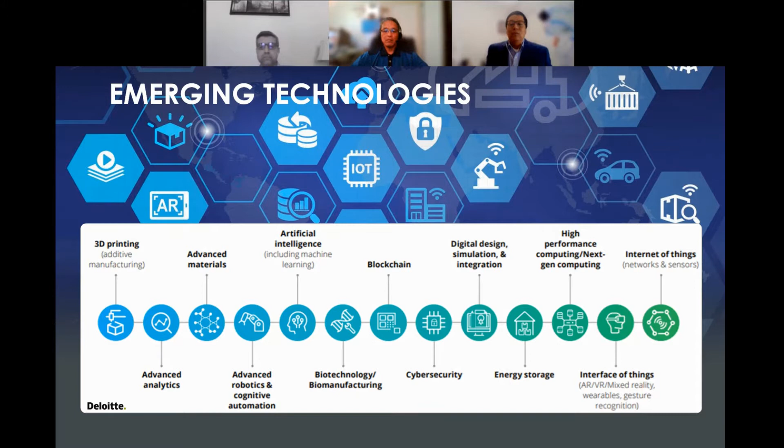This screen shows a recent report from Deloitte. The report speaks to the fact that new and emerging technology trends will change the industry. This is evidenced through many point solutions coming to market that focus on industry trends such as AI, IoT, or 3D printing. These point tools have accelerated the use of some of the emerging technologies for design. However, they are point tools and remain disconnected from the design process, leading to data silos, broken processes, and lost data. But what if you could harness emerging technologies such as AI, IoT, AR, additive manufacturing, etc., within your existing design environment and tools?

Well, you can. At PTC, which is why I'm so excited to be here today, we are taking these latest technology trends and deeply integrating them into your design environment so that you, as a design engineer working in your everyday CAD tool, can use them freely. PTC is the world's innovator of commercial 3D CAD, and we are now leading a renaissance of industrial design by delivering these integrated technology trends in Creo. Let me show you what I mean.

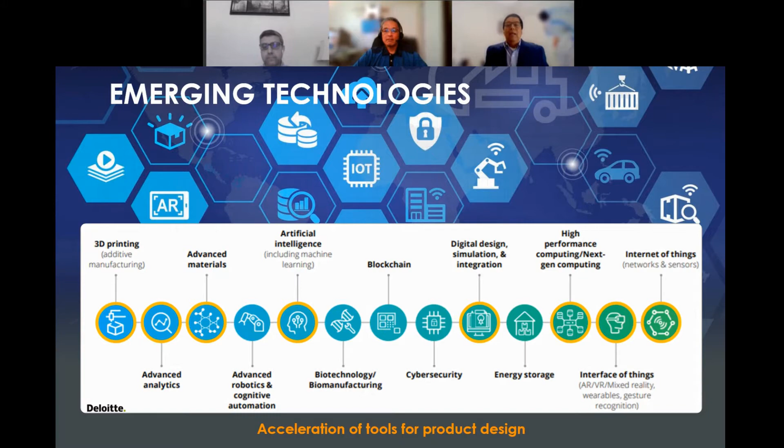At PTC, we're working on these 5 major areas, which happen to map very, very well to the major emerging technologies that Deloitte has outlined and that we know are critically important to you. I want to point out 2 really key things. First, we are not introducing point solutions. We are implementing and improving these areas directly into Creo. They will be integrated and be part of your existing workflow.

Secondly, Creo scales across the supply chain. We can provide this technology not only to the manufacturer of an exhaust system, for instance, or any T1 or T2 supplier, but also to the major OEMs themselves. Creo is unique in its demonstrated market success in handling that kind of scale. Creo is the only industrial design tool capable of scaling and supporting at this level. And we're taking it to the next level by augmenting the already robust functionality with the integration of this new technology.

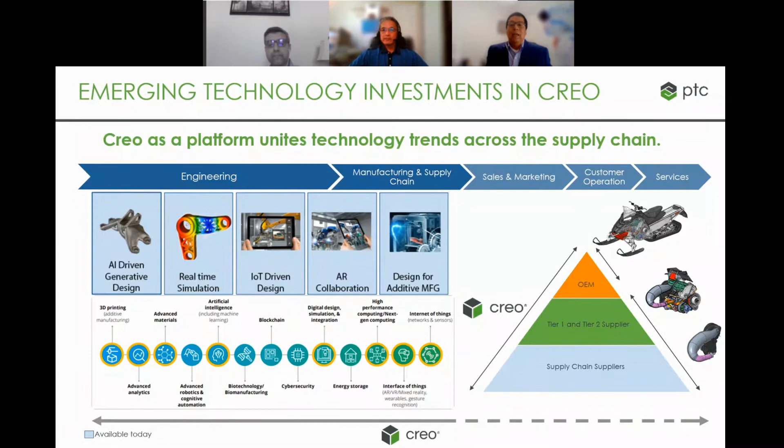So let's go one by one. Taking a look at generative design. Generative design automatically generates optimal designs from a set of system design requirements. It brings together advanced analytics, artificial intelligence, and multiphysics simulation to automatically evaluate and evolve numerous manufacturing-ready design combinations that meet the design objectives, whether that is for additive manufacturing, milling, forging, or mold. Generative design will help challenge assumptions and deliver high-quality, lower-cost, manufacturable solutions.

As we move across the workflow from generative design, we come to real-time simulation next with ANSYS. This enables not just powerful simulation to be conducted, but to be conducted as part of the design workflow. PTC is the only exclusive partner to be working with ANSYS that can bring this capability into the design environment. Everyone else has to utilize the same disconnected, siloed workflow where data handoffs are required, not with Creo and ANSYS.

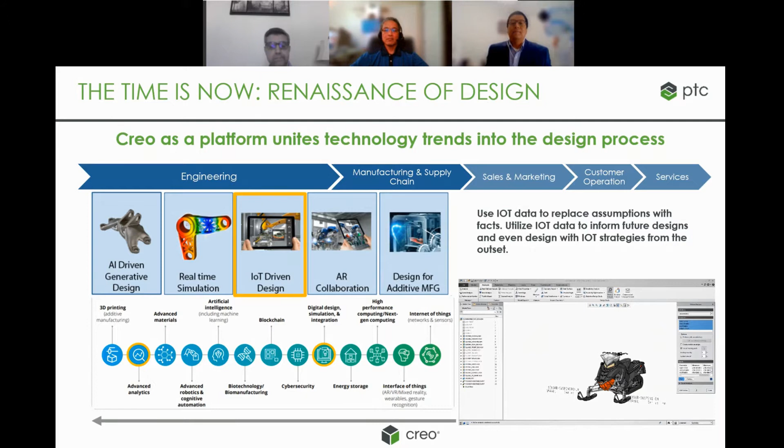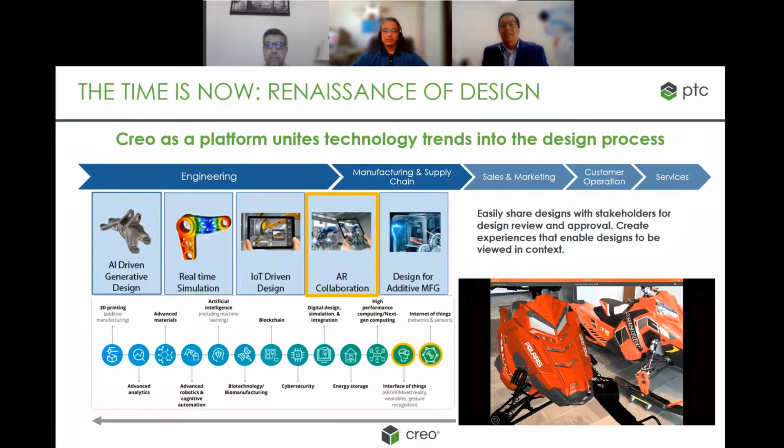Next is AR collaboration. With Creo, I'm able from within the design environment to quickly and easily produce AR experiences that enable stakeholders to not only visualize, but experience the design. You can easily share all your designs with stakeholders for design review and approval. Create experiences that enable designs to be viewed in context.

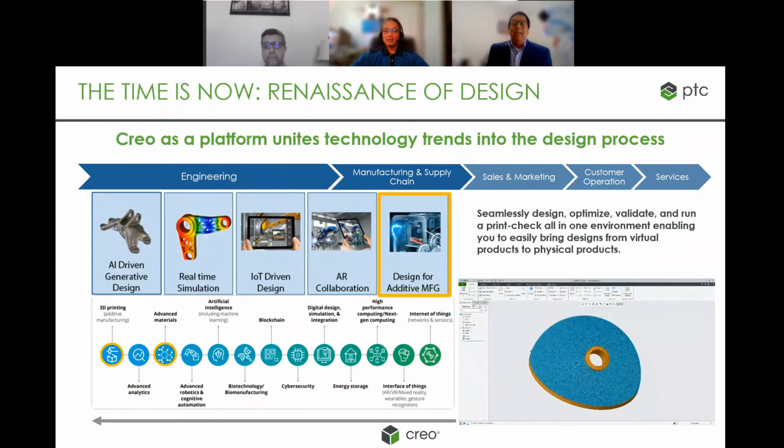Creo as a platform also connects from engineering to manufacturing, for sure. Seamlessly design, optimize, validate, and run a print-check all in one environment, enabling you to easily bring designs from a virtual product to a physical product. Now within Creo, you can create your tray assembly, place your parts or components, nest them, and send them to the 3D printer.

Now that we covered the trends and how Creo is being improved, let's look at a very important enabler to design for manufacturability. Thank you, Jose.

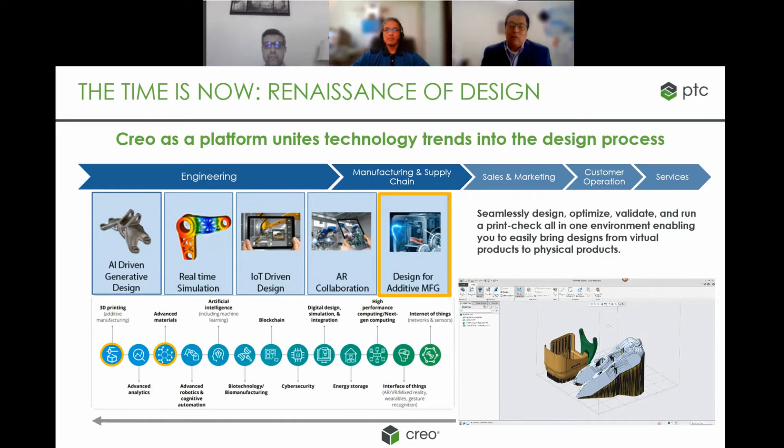I represent HCL. HCL is a world leader in engineering R&D services and solutions with over 150,000 employees and close to $10 billion in revenues. It's a privilege for us to be the engineering partner of the majority of the global top 100 product companies, representing almost all the major industry segments. Our products and solutions help our customers in their digital transformation journey.

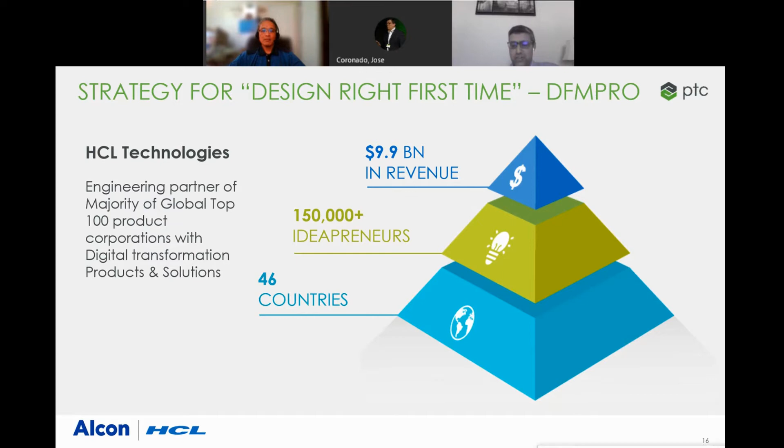You heard Jose talk about some of the trends in engineering, and one of the major implications of that is increase in product complexity. We see this challenge manifest across almost all our customers as global competition continues to intensify and the pressure to differentiate increases. Products are being made more and more smart and connected, and that continues to increase the complexity.

There was a survey done by engineering.com of leading manufacturers, and it came out that the number one reason the products are becoming more complex is because the mechanical designs are getting more intricate. As miniaturization happens and as you pack in more electronics and software content into these products, eventually your mechanical designs need to be able to accommodate, and that increases the complexity.

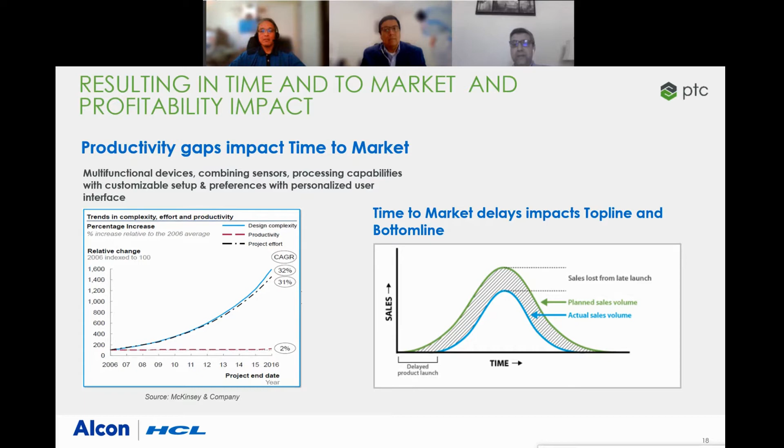And this gap leads to delays in product launches. Delayed product launches have a direct impact on sales. And usually the sales lost due to these late launches are lost to competition or other sources. To address this, design teams have to increase productivity and eliminate waste. Now, the best lever the designers have to get more done with less is to reduce rework and design right first time. Reworks typically can account for up to 40% of total project cost.

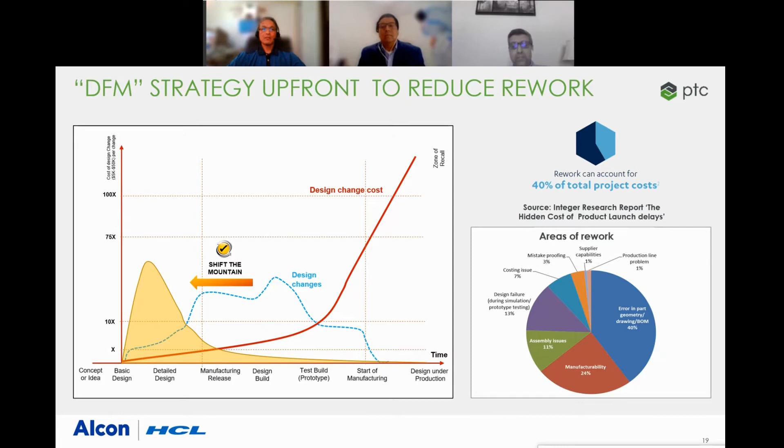Now, reworks themselves can be due to many different reasons. Our survey and research shows that typically about 35% of the rework can be due to manufacturability or assembly issues, basically design for manufacturability or assembly issues. And addressing them upfront during the design has tremendous benefits. Companies are realizing this, and they're adjusting their operational processes to handle many of the DFMA issues upfront.

Now, the traditional approach, though, which is usually manual, is fraught with challenges and is not very scalable. For one, since there are hundreds of checks in DFM, there's always a chance that some of the key checks may get missed in the manual process. Secondly, there is no closed loop to capture the learnings from the rework systematically and incorporate them for future validations. And finally, in the new normal that we all live in, with more and more remote working, lack of proximity will be a challenge.

Therefore, the solution is a software-driven approach in an easy-to-use CAD integrated environment. You heard Jose talk about the need for a single integrated environment for handling the product development process. Now, the automated approach saves time and ensures that all key DFM checks are completed upfront. And since it's in your native Creo environment, it's easy for designers to learn and use. HCL's DFMPro software is proven across many industries and leveraged by designers as a digital assistant to help design with confidence and design right first time.

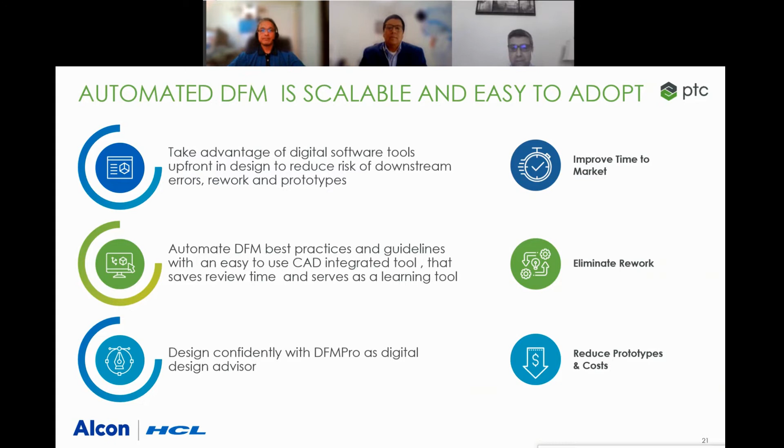With this, I'll hand it over to Alex. Alex is from Alcon, and he'll talk about how Alcon is leveraging Creo and DFMPro upfront during the design process and reaping the benefits. Over to you, Alex.

Thank you, Nambi. Before I jump into discussion about DFM, let me tell you a little bit about Alcon. At Alcon, we develop innovative products to help people see brilliantly. We are the largest eye care device company in the world. We work in 70 countries and serve patients in more than 140 countries. Our leadership is driven by cutting-edge innovation and breakthrough technology, transforming the way we treat eye diseases and eye conditions.

We have the widest array of eye care offerings in the industry, with products organized into two businesses, surgical and vision care. Driving innovation is the key to our business, and we have a history of launching new products to market for the first time, driven by strong R&D. So when we talk about strong R&D, it also means keeping up with our own innovation.

As a company, we share the same challenges for developing products as the rest of the industries, such as driving innovation to ensure product differentiation, contending with today's product complexities, meeting milestones, onboarding of new engineers, or just keeping up with the ever-changing regulatory landscape. To be at the cutting edge of product development, you need to have the right tools, people, and processes.

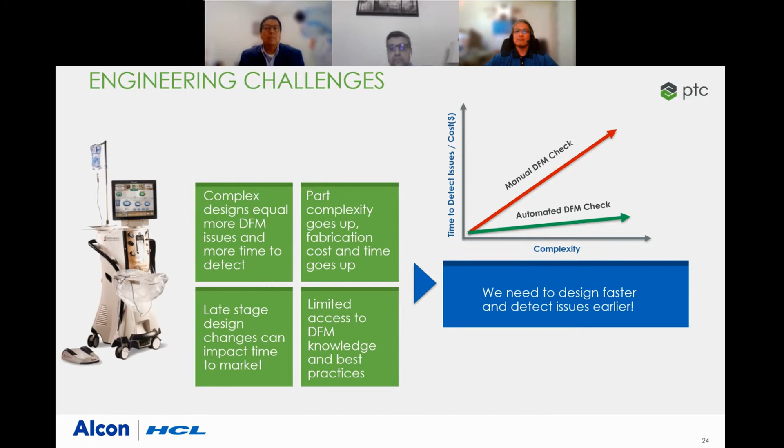But as Nambi points out, traditional DFM approach has its own set of challenges. Manual reviews are very time-consuming. There's a lack of knowledge and best practices available, and often difficult to locate these company DFM guidelines if they even exist. But what would it mean to have a design advisor recommend fixes based on your company's guidelines while you design? But let's first answer the question, why is DFM critical and why do we even care?

Well, what about cost? Reducing cost without reducing performance. For example, minimizing part count, standardizing parts and materials, designing parts for loose tolerances, creating modular assemblies, streamlining the number of operations in the manufacturing process. As you know, cost of engineering change is exorbitant during production, which may lead to rework, which may lead to delays. And as you know, delayed product launches have a direct impact on revenue and bottom line, including loss of market share.

And knowing supplier capability and ease of manufacturing ensures good part quality that is easy to manufacture at a competitive price. Tolerances impact cost for manufacturing, and DFM highlights the risk of using such impossible to achieve tolerances for the manufacturing process. What about safety and efficacy? We must consider selecting materials for cleaning agents, fire retardants, and even water ingress. So, as you can see in the graph to the right, the time to incorporate these DFM measures manually is significantly higher as complexity goes up.

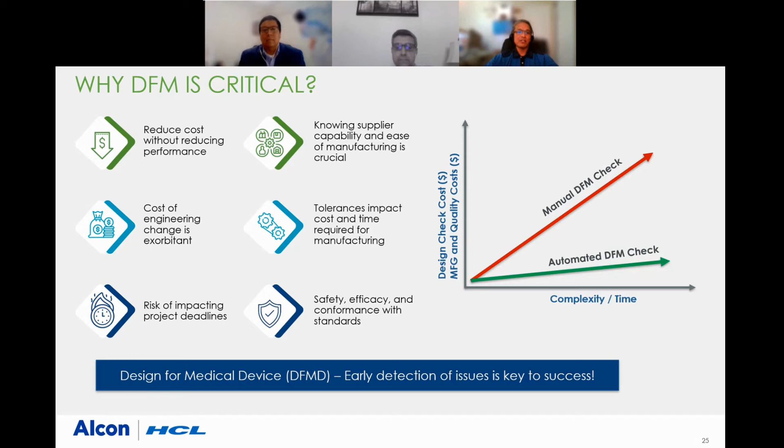But if we can automate this check process while we are designing, we could drastically reduce time and cost while increasing quality and getting it right the very first time. So how can we automate the DFM check process with our Creo platform? The answer is DFMPro, an add-on Creo application for manufacturing. So let's go see how this is done.

The images on the top right-hand side depict a typical DFM guideline, and as you can see, it has many parameters that need to be checked before the design of even a rib can be added to a plastic part. Imagine trying to check on hundreds of parts and applying these guidelines manually. Also, as you can see, we use Creo as our design platform. It allows us to visualize the final product before steel is even cut.

It allows us to create virtual parts and assemblies that make up the subsystem within our product, communicates design requirements to cross-functional design teams that all can see, and provides the capabilities and design tools to support all cross-functional design teams. DFMPro is an add-on that is directly integrated inside PTC Creo Parametric, adding manufacturability to our design platform. And with just a few clicks of a button, when we are designing, it activates the design advisor.

It's also linked to Windchill for DFM traceability. It also helps stage models for more expensive analysis like mold flow simulation, or even help start conversations with your vendors at the beginning of your project.

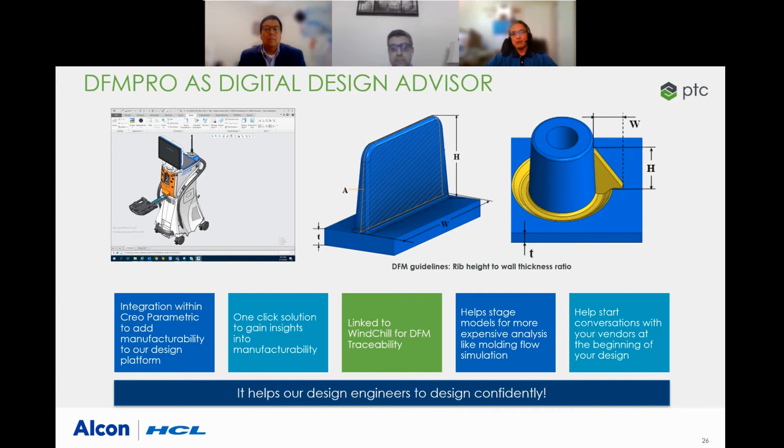Now, let me show you how we use it with an example. So open a part in Creo. Here's a plastic part, and Design Advisor is activated to provide recommendations while you model. Just input the parameters and go.

We have an option to analyze the part after modeling is complete, where we select the company guideline for this material, fabrication process, and click OK.

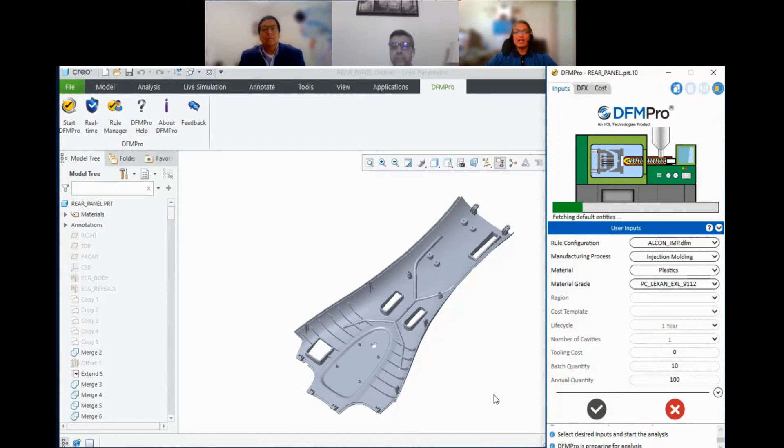Design Advisor will now select the pull direction, and all we need to do is input the material and wall thickness desired, and click OK. DFM Pro is now comparing the part against each company's DFM guidelines for plastics. What is nice is now company guidelines are available for all design engineers, regardless of location, and company guidelines can be updated in real time.

This is the DFM Pro interface, organized rules by criticality, and shows recommendations as well as the rules that pass. This part is showing no undercuts and no thin wall conditions.

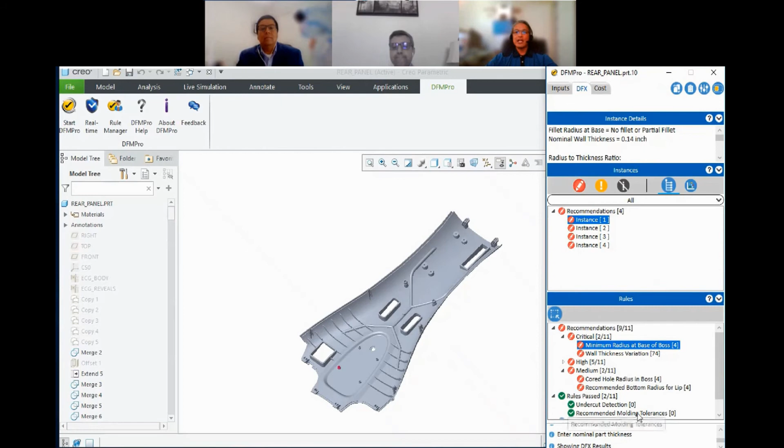Here you can see the recommendation to add a radius at the base of the boss, and by selecting the instance, Design Advisor is highlighting the area of concern on the Creo model, allowing you to comment on the issues to fix for later review with the design engineer, and add the recommended fillet to the model, which in this case is 16 thousandths.

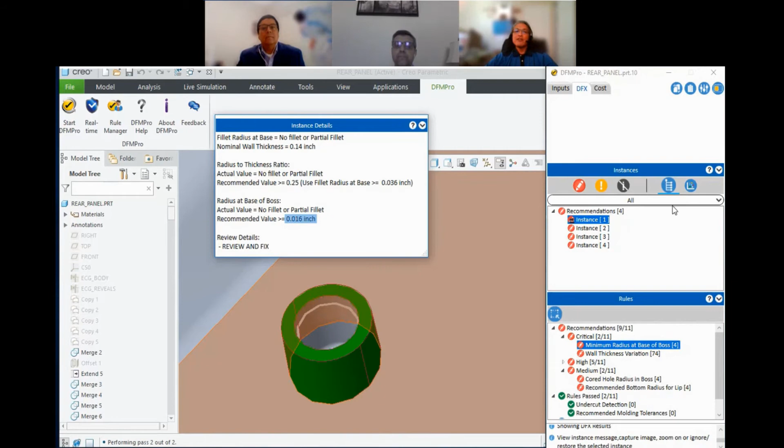DFM Pro also has a help menu that directs you to content for further explanation on this specific rule, with examples. Here are a few other rules, like minimum radius at tip of boss with examples, or minimum draft angle...

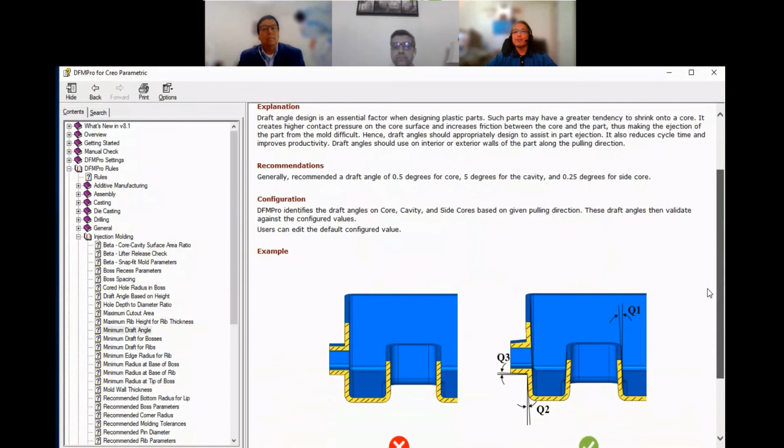...with an explanation why draft is important and the recommended parameters for core, cavity, and side pull classifications, or wall thickness, where two walls are too close, resulting in thin wall conditions that can affect the quality of the part and reduce the life of the tool.

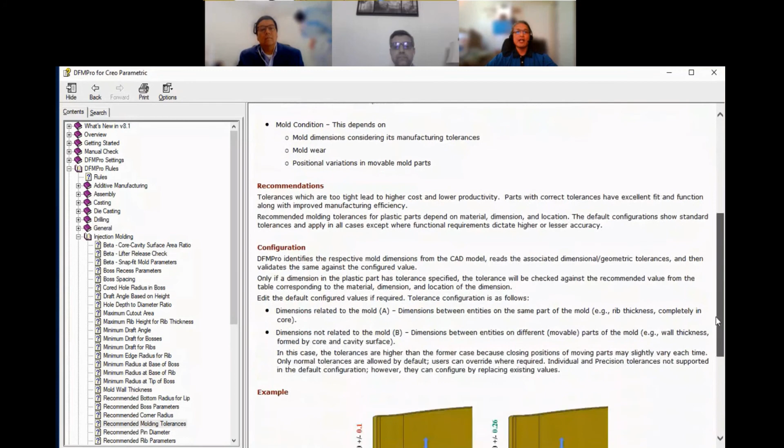There's even a section for recommended tolerances for ease of manufacturing. Tolerances that are too tight lead to higher costs and lower productivity. Here are a few examples of how DFM Pro identifies mold dimensions from your CAD model.

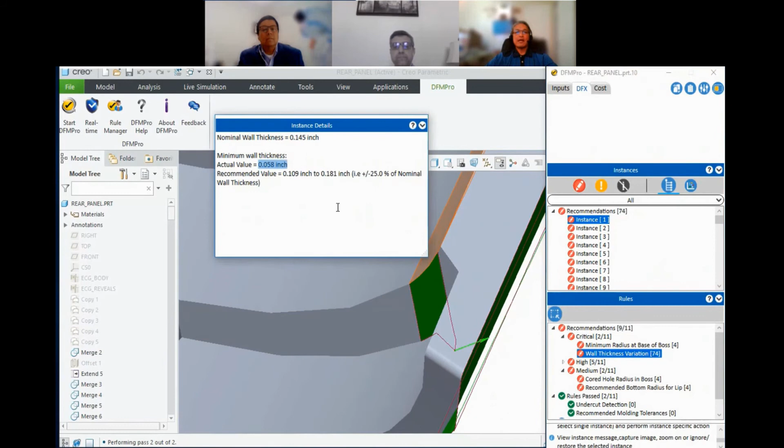Now let's take another example, like wall thickness. Here it is, showing us the base on the nominal wall - the actual minimum wall for the plastic part is 58 thousandths - and the Design Advisor is flagging the area on the Creo model that is not meeting the guideline.

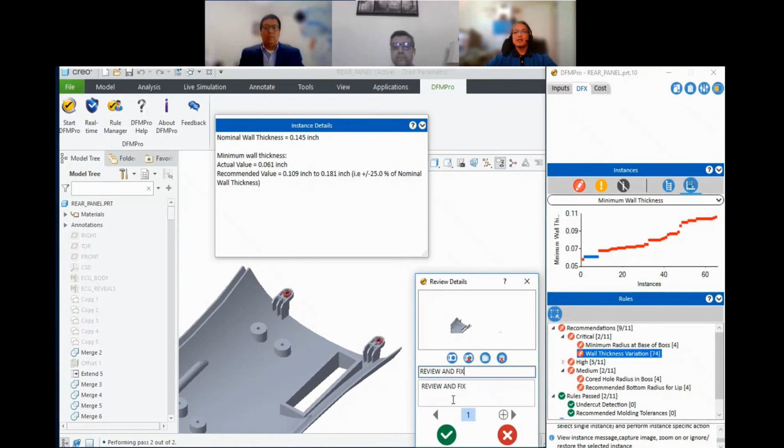I can also go to the scatter option and select multiple areas for analysis, and the Design Advisor highlights all these areas in Creo, which now allows us to add comments for the same issues all at once, saving us time.

Now that we are done analyzing the results, we can go and create a report that will include all the recommendations and all the comments that have been inputted. Select the reports and click OK.

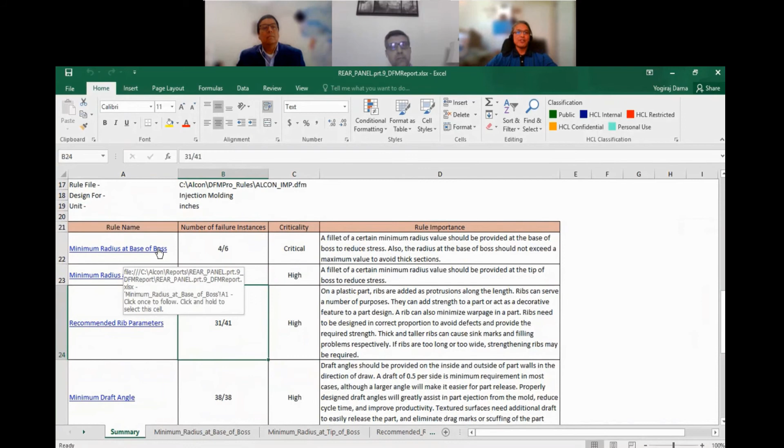Here is the Excel report with the company logo and list of rules analyzed. Let's pick one of these guidelines on this report, and we can see the recommendations for the guidelines, the actual values versus the recommended values, the comments we inputted during the analysis, including the associated image for these comments.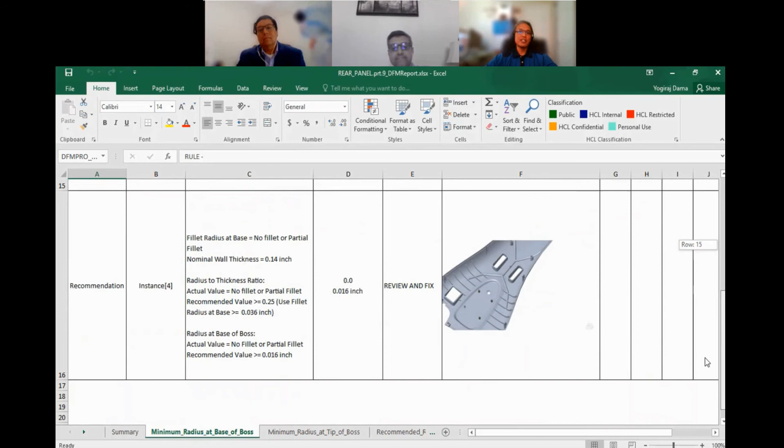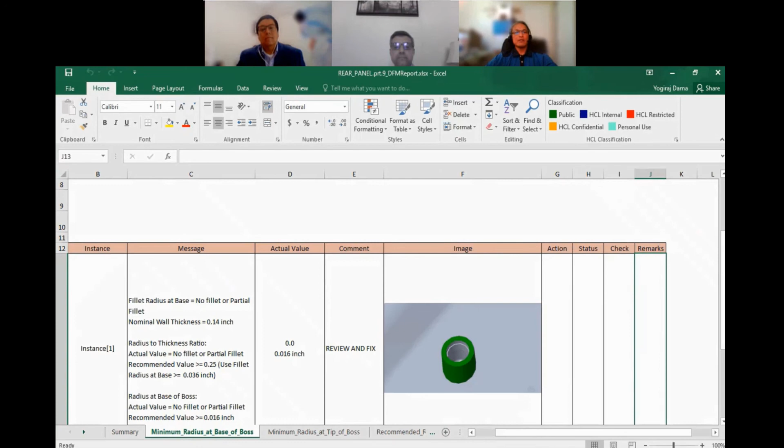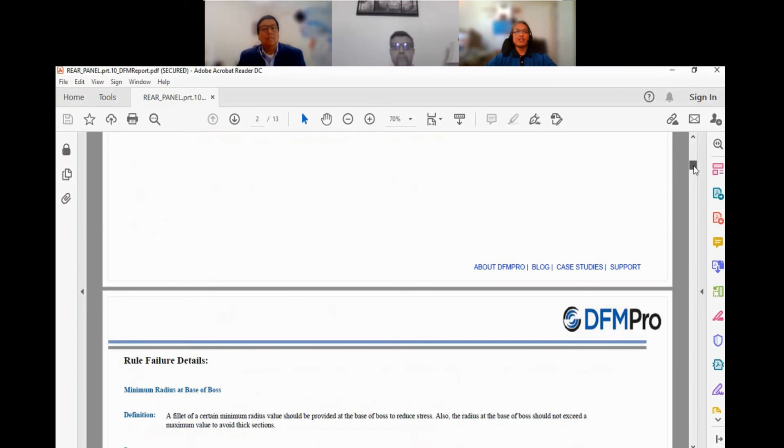We even have a section where we can provide action items, status, and additional team comments. The second report is a quick PDF report highlighting the part being analyzed, when it was created, who created it, guidelines being used, fabrication process, results summary, number of recommendations and their importance, and a summary of each general guideline with part images.

That is DFMPro in a nutshell. Imagine all the time savings identified: a Design Advisor that identifies and recommends advice based on your guidelines that you can act on, a centralized guideline of the latest company standards deployed company-wide, tools for commenting, on-demand help, and DFM reports that organize the recommendations and comments into an Excel report that can be used in a design review, with no more time-consuming manual creation of reports. Simply doing more with less.

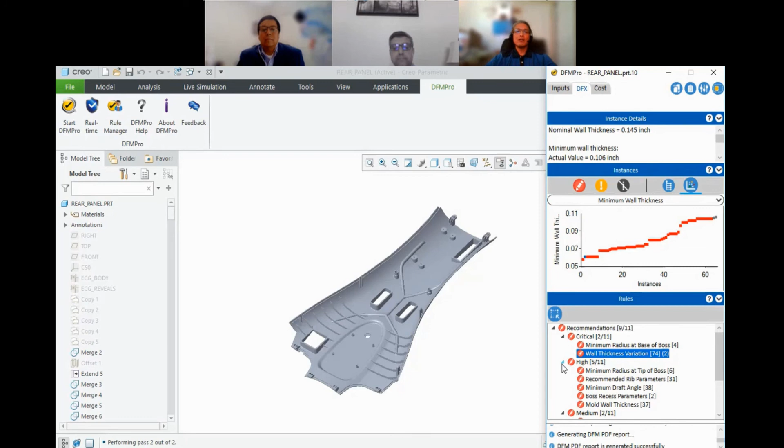In summary, having a platform like Creo, allowing stakeholders and teams to visualize the end product, communicating the design requirements, providing the tools for the design teams, coupled with Windchill for design traceability in one working environment, gives us a winning solution for designing faster with design traceability.

Creo as a platform connecting to our manufacturing solution, DFMPro, we now have a winning solution for reducing costly design changes and reducing and possibly eliminating rework downstream, ensuring projects stay at a fast pace while reducing the worries of having downstream issues going into production.